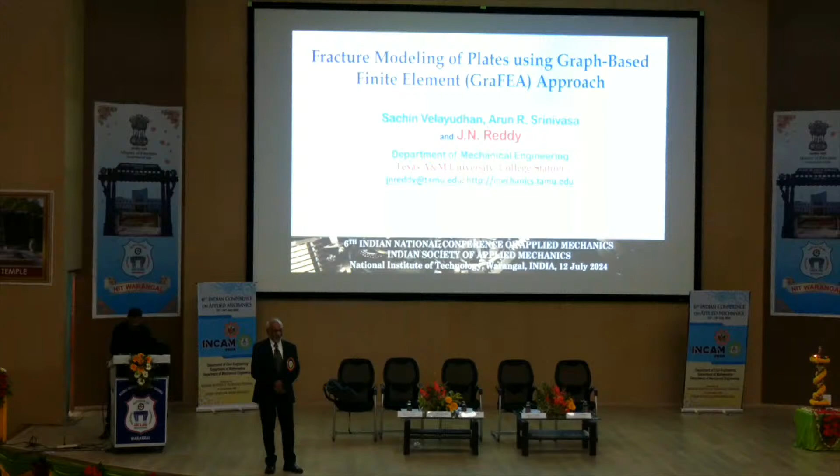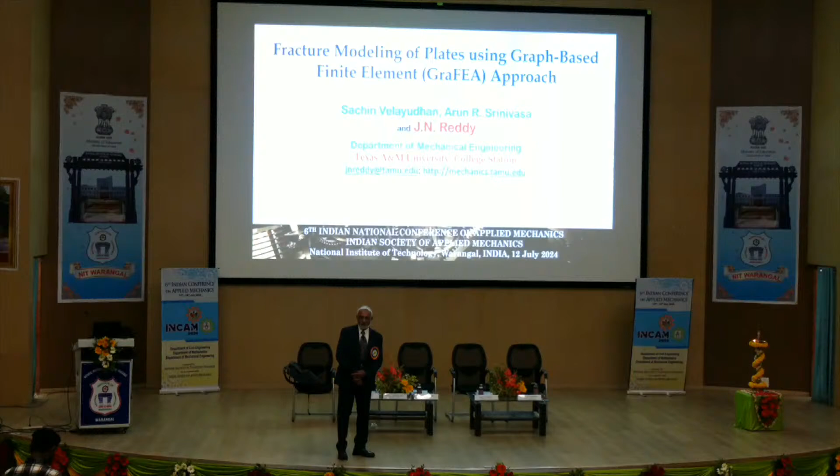Okay, once again, good morning. It's really a pleasure to be back. Since I'm from here, I don't know how many of you know, I went to primary, middle, and high school in Hanamkonda. So I will say, Endaro Mahanubhavulu, Andariki Vandanamulu. All of you know what that means, right? There are a lot of great people - to them, my pranams, namaskar. So I will start with that. Really, when I come to India, it is always a very special moment in my life. Especially now that I'm old and become more sentimental. My mission in life has been the same: creation and dissemination of knowledge, sharing the knowledge.

So my wife always asks, why are you traveling so much at this age?

Because I don't want to kill my passion. That passion, once it goes out of your body, you die very fast. So you always have to have some passion. Whether watching the movie or cricket or playing golf, all of those are passions. But passions that really somehow make a difference in society, I think that is even bigger satisfaction.

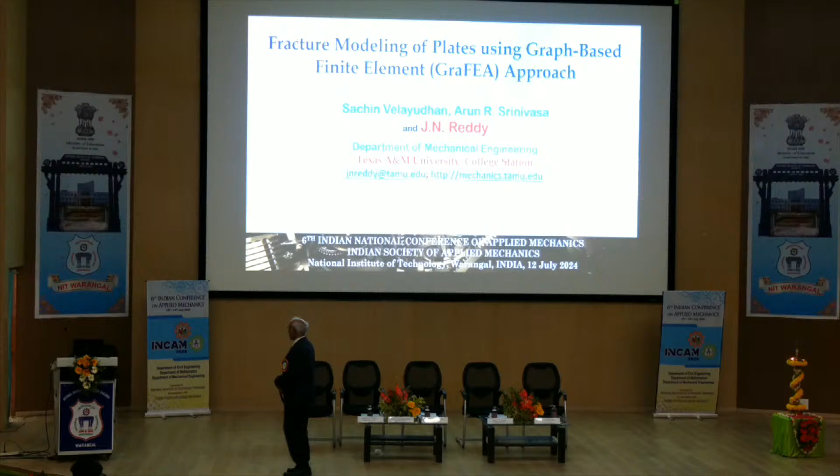So with those few remarks, let me get to work here. In the interest of time, I think we are running late, so I will try to give the gist or main ideas of what we are doing here.

As many of you know, fracture mechanics is really outside the domain of continuum mechanics. What I mean is, it does not allow you to have discontinuities. In fact, the very word continuum requires you to have a continuity of matter. The matter has to be distributed continuously so that we can take a limit in space, delta x goes to zero. It should not land on a different planet, so to speak, or different point. There should not be any gap. You should smoothly go from one geometric point to the other.

So this requirement makes continuum mechanics not able to cope with the fracture. So what do we do? Engineers are problem-solving people. We don't sit there and say, oh, I can't do it. We always say, I can do it. We find a way to do it. We have been doing that.

So there are many approaches, and we came up with an approach, and I'm putting the names in front of mine. Sachin Velayudhan is a PhD student, and Professor Arun Srinivasa is my colleague. And this is where I want to bring Professor Alvar's name. Arun actually was a student in his class, when Alvar taught strength of materials, mechanics of materials course. He was in his class.

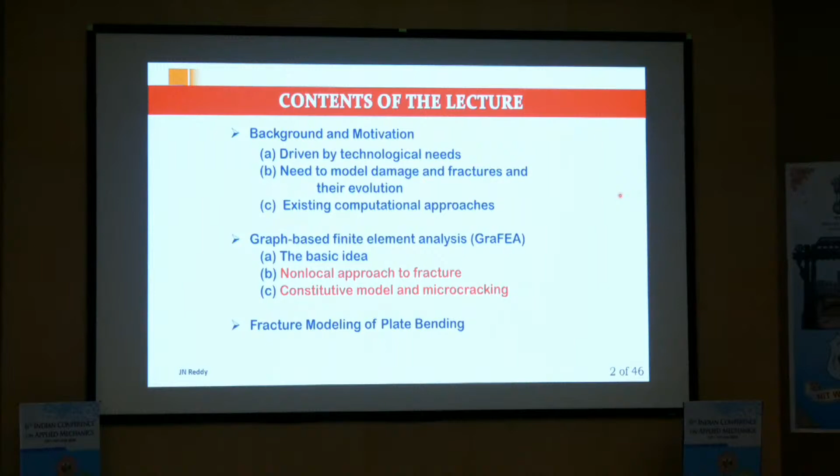And then we also, the latest work is about bending of plates. In the past we have worked on elasticity, both 2 dimensions and 3 dimensions, in predicting the fracture in concrete and glass. Now we are trying to do the same thing with plates in the sense that there is bending. And then the next step, which is not here yet, is to do multi-phase materials like composites, which are much more challenging because of different kinds of modes of failure.

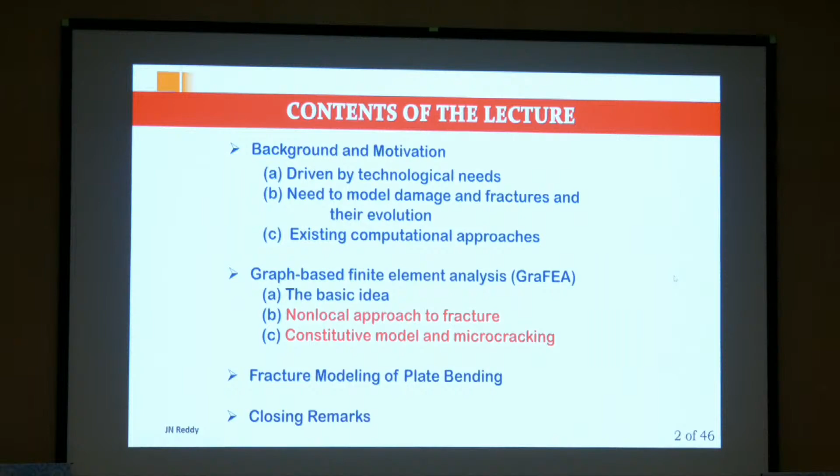All right, so let me say a few things in the form of comment. It's a very deep subject, and I don't want to show off here, so to speak, but I want to encourage or make you feel that, oh, there is something I can do. Follow up - we have the software which we can share.

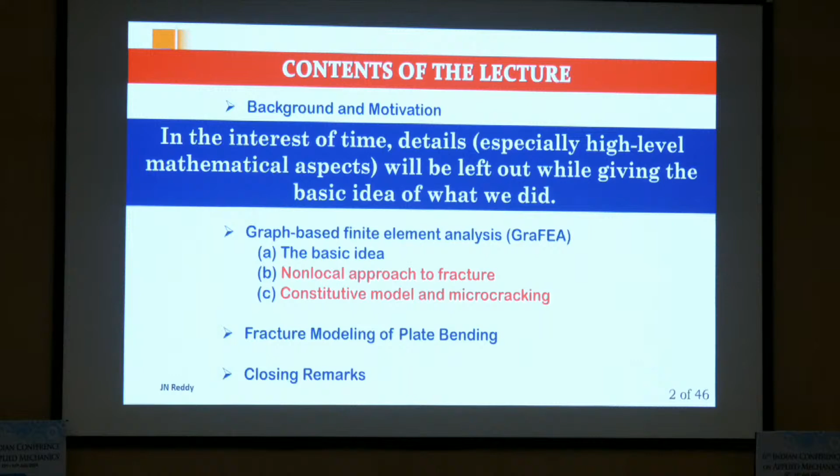The very first thing is to understand that micro cracking in materials is very common, whether it's composites or concrete, which is also a composite. When we talk about micro, we really cannot see it with the naked eye, so they are there—we may call it damage—but they coalesce during service conditions while doing their functionalities, and then they become cracks you can see with the naked eye. That's a very important problem, because once this damage develops and coalesces, functionality may be compromised. So we need to know in some way what the residual strength or ability to function is.

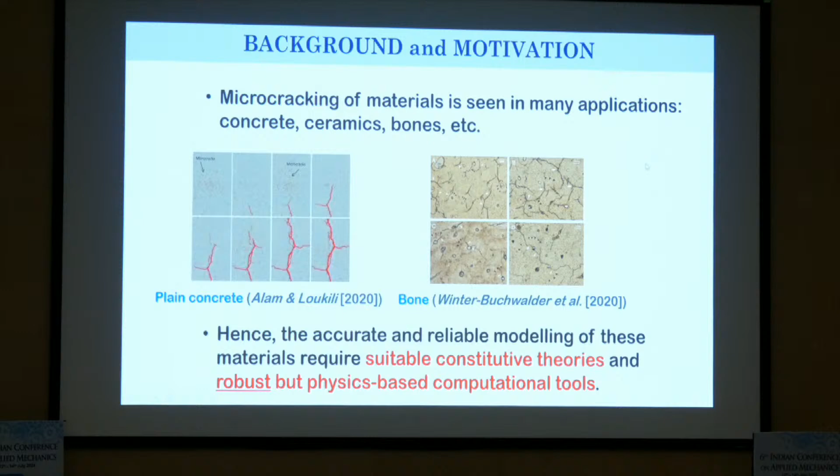So in general words, accurate and reliable modeling of fracture in materials is very important, especially constitutive models that dictate the prediction of failure. The most important thing we should all understand is that it is not the deterministic path of the crack, it is the probability of failure. Because designers don't look for deterministic things—the band in which it is going to operate is what they are looking for. We should really pay attention to the probability of failure rather than accuracy.

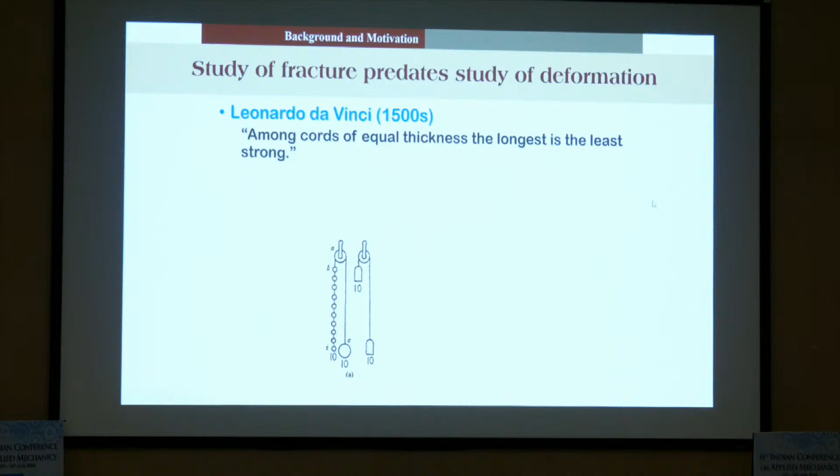Even before people talked about deformation, they were more interested in failure. Way back, if we go to Leonardo da Vinci and also Galileo, both of them said among cords of equal thickness, the longest is the least strong. Many of you know from strength of materials that deflection is proportional to the length cubed for a point load, or length to the power 4 for a distributed load. That means the longer it is, the larger the deflection, which can cause other problems including failure.

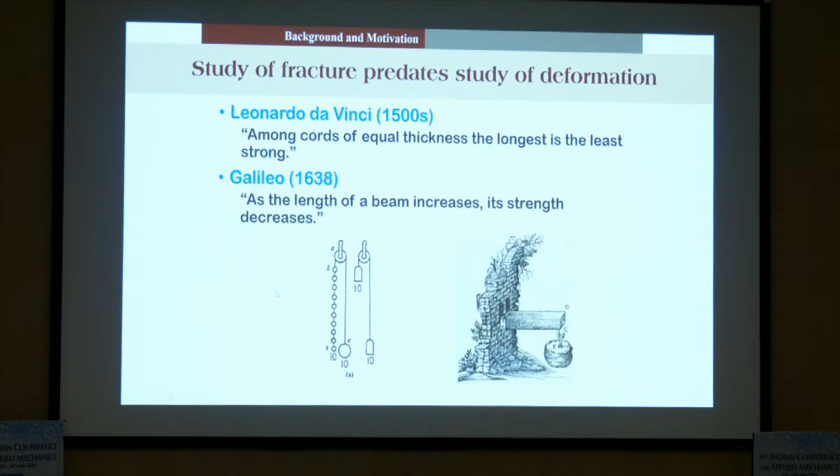And second, as the length of the beam increases, its strength decreases. Both of them allude to the same fact: that the weakening of a structure is connected to geometric dimensions in addition to material properties.

But the point I'm trying to make is that all of the existing techniques—such as the extended finite element method (XFEM), cohesive zone model, phase field, and even peridynamics, the new kid on the block—can only address single or multiple cracks. But if you have hundreds of cracks, they don't know how to handle it, because you'd have to put hundreds of cohesive zone elements and you don't know where to put them. XFEM is the same thing—that means half of the answer to the problem must be known even before you apply them.

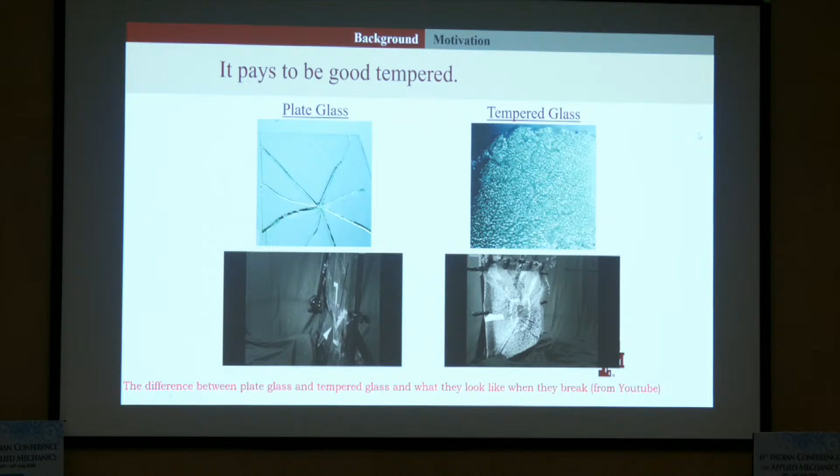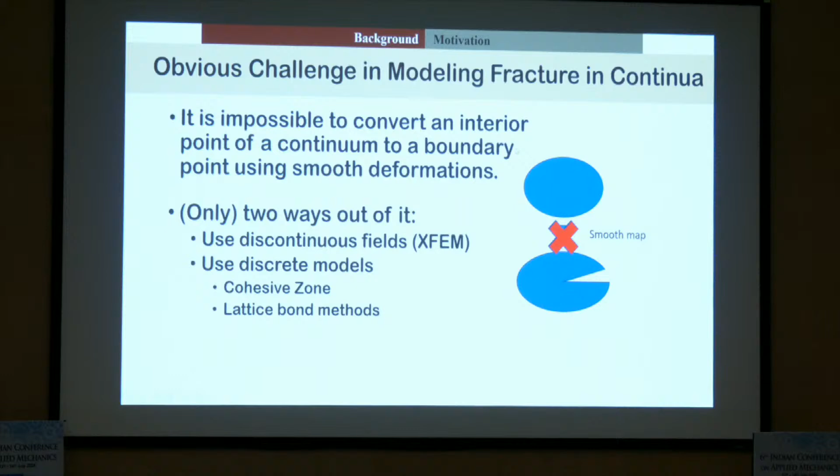So there are obvious challenges, as I said to start with. When fracture develops, an interior point becomes a boundary point, and this is not allowed in continuum mechanics. So how we get around it as engineers is to use discontinuous fields—that's what XFEM does—or use discrete models, numerical techniques such as cohesive zone models or lattice bond breakage.

Everything we do is a model—that's my statement. A lot of times people think continuum mechanics is an exact science. It's not. The physical laws, just like many civil codes interpreted by supreme courts of each country, have interpretations—meaning, what do you include in the statement. For example, Newton's second law of motion, what does it actually say?

The total time rate of change of linear momentum is equal to sum of the forces. It's a very generic statement. Then you have to identify what are these forces: short range forces, long range forces, magnetic forces. There are a lot of things. So to quantify that statement, we only take some parts of it that we understand and put it there.

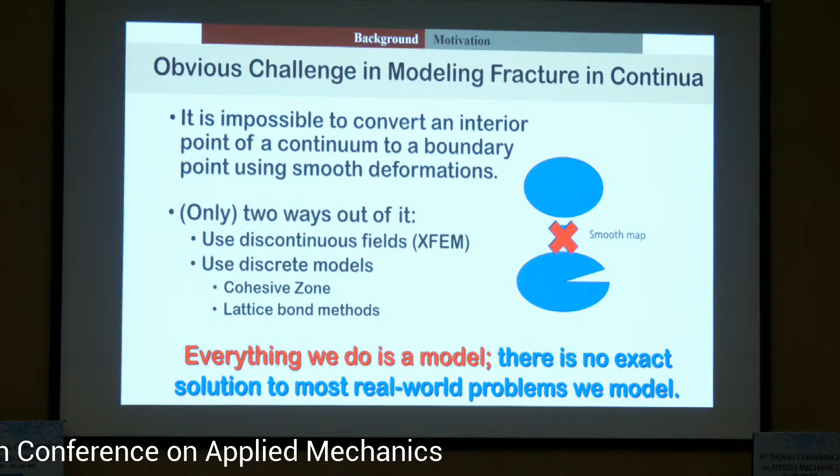So the quantified equation is a model, to the extent you understand it. There may be a lot of other things happening, other kinds of forces or stimuli. So what I'm trying to say is everything we do is really modeling, a representation of the physics to the extent we understand it. So there is no exact solution or exact mathematical model to anything we deal with. But that does not discourage us. We continue to improve. That is what research is all about.

So let me say that simulation of fracture has gone into two different ways in the last several decades. One is continuum-based models. That's where linear elastic fracture mechanics, continuum damage mechanics, extended FEM, all of those came, even including the phase field.

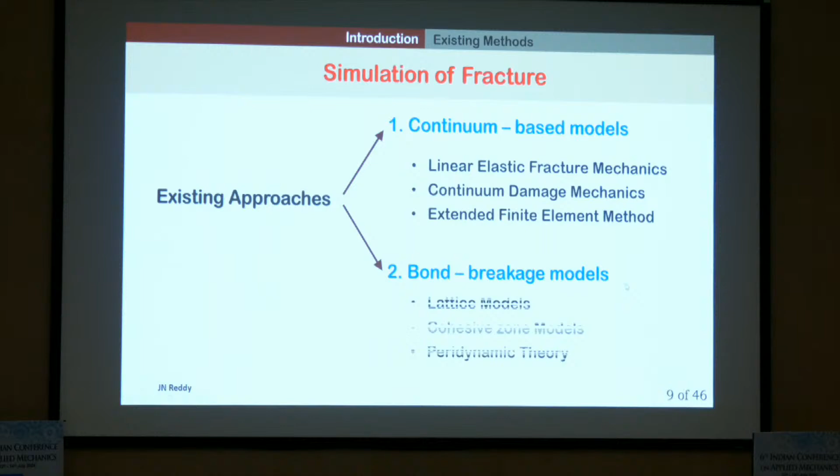Then there is a second category called lattice models, cohesive zone models, peridynamics, all of these ultimately breaking the bond between two points. So each one has its own merit.

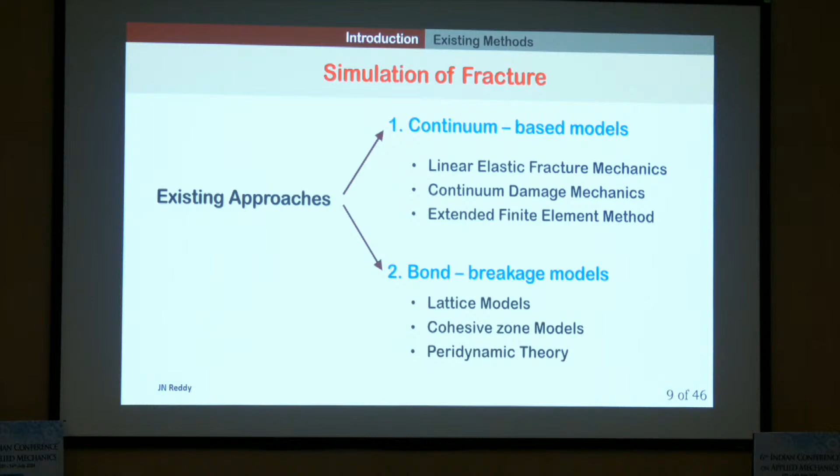But we want to do both. That means we want to solve problems that are continuum type, but they develop discontinuities because of damage and fracture. And bond breakage is very good, because all you need is to tell whether the distance between two points, and that distance is going to change because of the force acting between them, is discontinued because of a crack, breaking that bond. So we want to bring both of them into the model, and that gave rise to the approach we are talking about.

So let me go and review shortly or briefly this linear elastic fracture mechanics. It really addresses one single crack. So if you have a couple of them, it is really very hard to do it, especially crack closure.

And many of these methods are not able to do crack closure. Because if two cracks are perpendicular to each other, while one is propagating, the other may be trying to close. By the way, I'm not saying it is going to bond back, that doesn't happen. But closure is real, right?

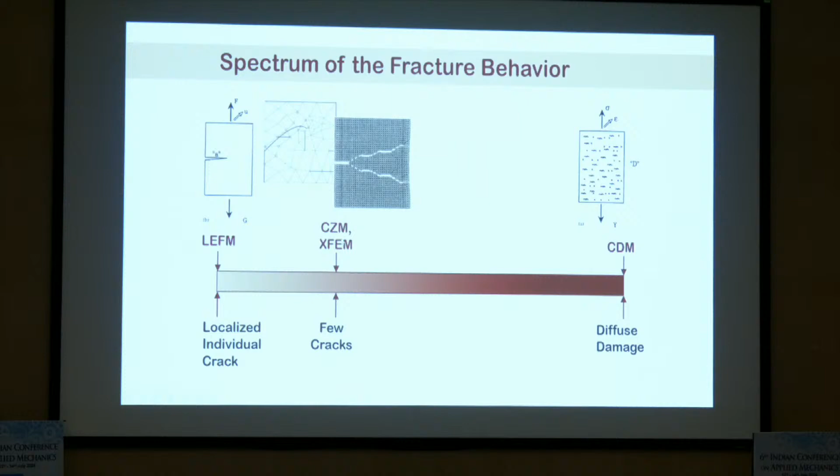So CZM, the cohesive zone models, XFEM, all of these deal with few cracks. And when you go into many cracks, then you have to talk about bond breakage. Especially if it has millions of cracks, continuum damage mechanics or diffuse damage is the other extreme. So all of these have to be accounted for. And of course, if you are only interested in one or two cracks, you can remain in that area.

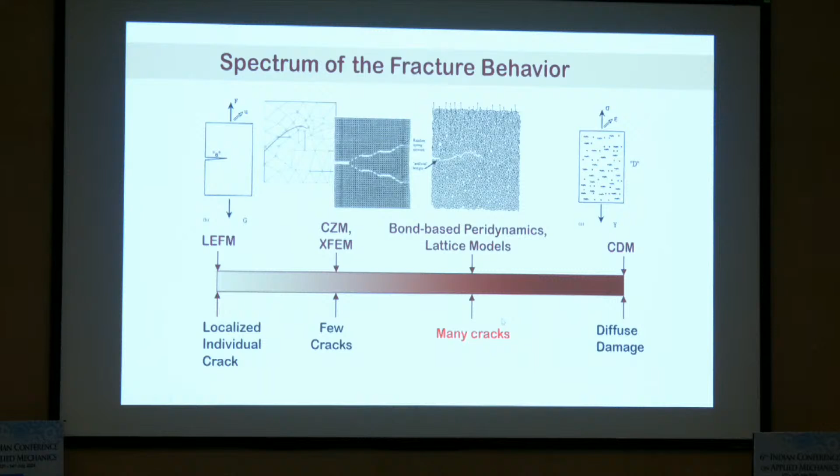But if you have many, many cracks, especially as seen whenever you see concrete, where the slab is poured and after it settles, you can see a lot of micro cracks. So that's the reality. So we have to address how to take care of them.

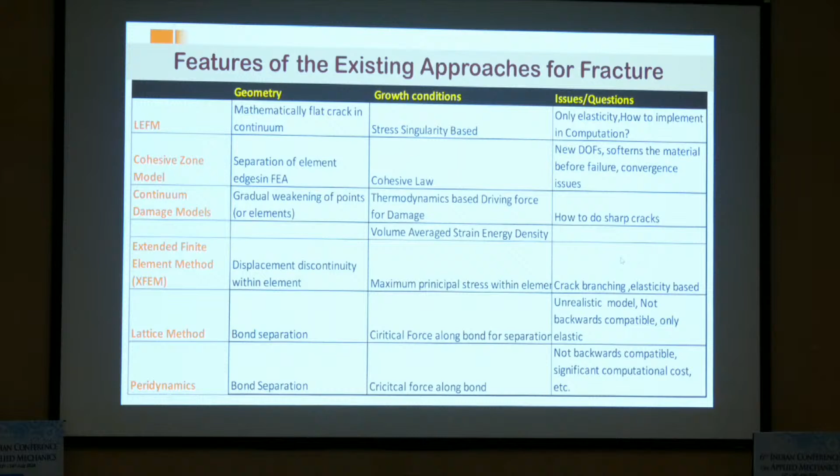All right, so I don't want to read any of these, but I listed different methods and what are the issues with them. None of these are able to do every one of the problems I listed in the previous slide. So how do we deal with the geometry of fracture?

We will use the concept from graph theory. Graph means, really, as engineers, graph is to plot points, right? So the same thing in the case of discrete structure, you identify points. In finite elements, they are nothing but nodes of the mesh. So by connecting those nodes, you're creating elements.

But what we have done traditionally, every time we wanted to compute stress, we use the nodal values to come up with the displacement function, then differentiate it, get the strains, then multiply with the material constants to get the stress, at Gauss points, interior of the element. And then if a Gauss point experiences a threshold, exceeds the allowable, then we declare that element failed. So this is very broad brush.

So what we did, accidentally, I and Arun Srinivasa wrote a paper without thinking fracture. Why don't we actually calculate the forces and strains along the edges of the element? Think of a triangle, so along the sides of the triangle. We can do it, right? We can write along any line if you want. So then it occurred to us, if I know that force along it, I can also check if that force exceeded the value.

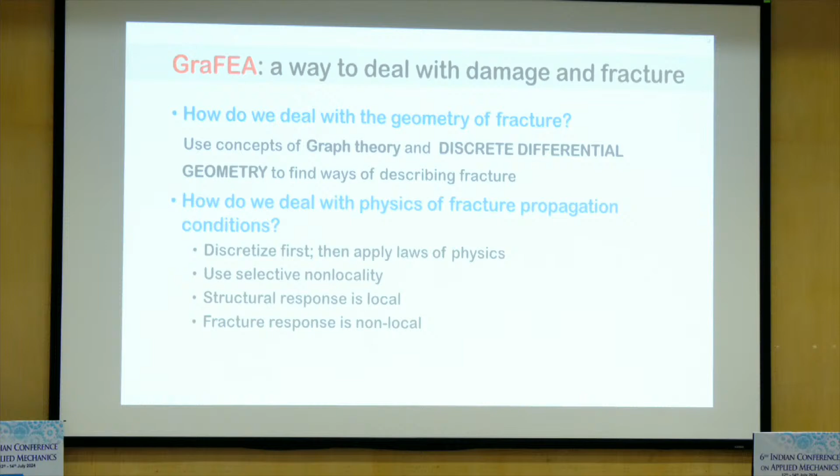Again, in the interest of these things, I started with these points and connected them. This is the graph, but that graph is nothing but a mesh of finite elements. And another very important thing in our work...

We give a lot of value to duality. Duality plays a great role - some people don't recognize it, but that's what it is. Finite elements is about duality, but in the books they don't mention it too much. Structural mechanics people are more conscious about it, because there is always cause and effect. One causes the other - you cannot ask for both to be determined. You have to know one and determine the other. That is how the reality is.

So we say the primary variable, such as displacement, lives on the primal mesh, which is shown here, whereas these dual variables live on a dual mesh, which is really nothing but Voronoi diagrams for the given structure. That means by cutting through these edges, you come up with another polygon, and that is where, along this boundary of the polygon, the fracture propagates.

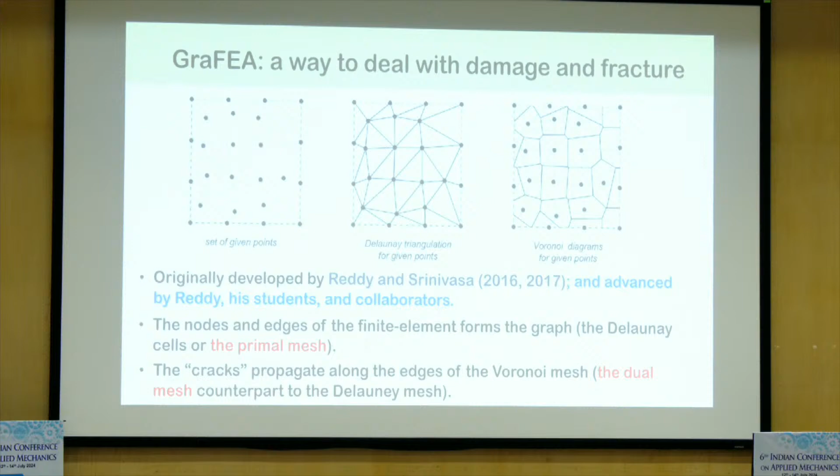So, anyway, this is the paper I was referring to, and that is what led to all these later developments. I won't go into all the details here, but the fracture modeling in the case of plate bending is the latest work I want to share with you.

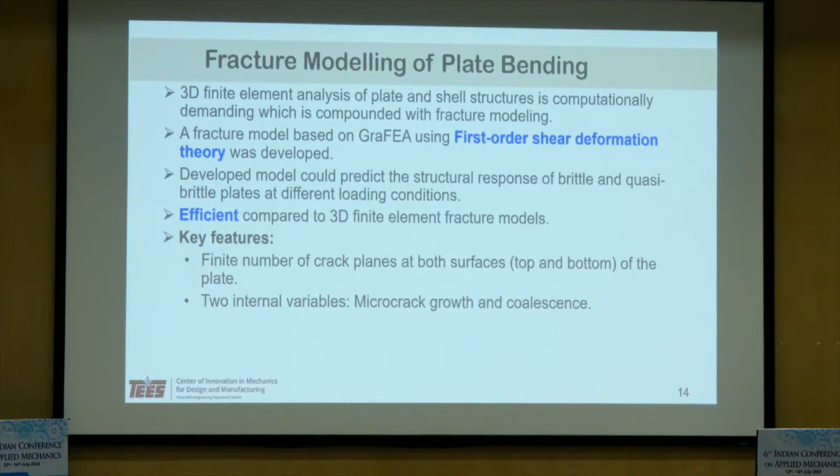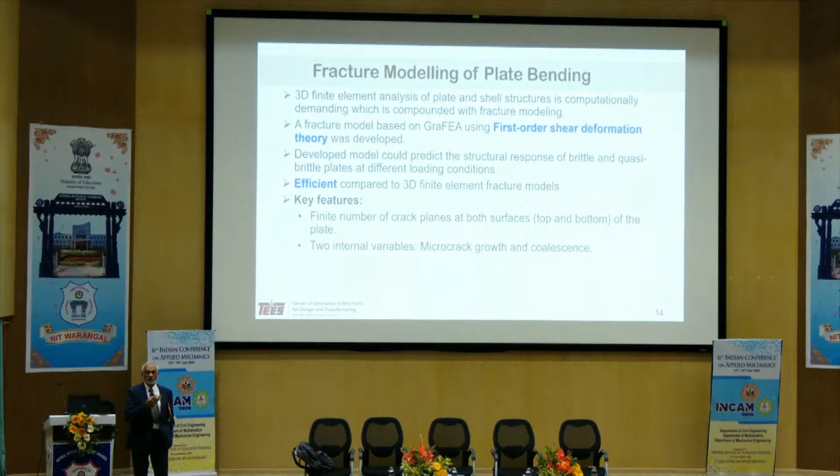3D finite element analysis of plate and shell structures is not common because it's computationally very intensive, independent of fracture mechanics. For example, if somebody models an automobile body structure, they don't use 3D elements. Maybe for a piston rod they may use 3D elements. Because we have very powerful plate and shell elements in Abaqus or ANSYS, it is much more economic computationally. So when you think about plates and shells, you really think of plate and shell theories instead of 3D elasticity.

So we bring that into fracture modeling using the first order shear deformation kinematics. That means we account for the transverse shear strains also, which is not common in the traditional or classical plate and shell theories. So we developed a model that could predict the structural response of brittle and quasi-brittle materials at very different loading conditions, even including strain rates. We actually do dynamic analysis, impact. You will have an additional lecture tomorrow on that kind of thing.

The key features are a finite number of crack planes at both faces. When you do impact on, say, a plate, the crack actually develops at the bottom first, not on the top. So we model both surfaces. In plate and shell theories, only the mid-surface is the real action, but we created a mechanism to study what is happening at the top and at the bottom surfaces. In an actual physical test, a drop test, a sphere dropping on a plate, it actually develops a crack that initiates at the bottom and then propagates through the thickness to the top also. So it is three-dimensional in terms of the actual physics, but in the interest of computation, and also the ability to see what is happening at the top and bottom, we were able to accomplish that through the crack planes.

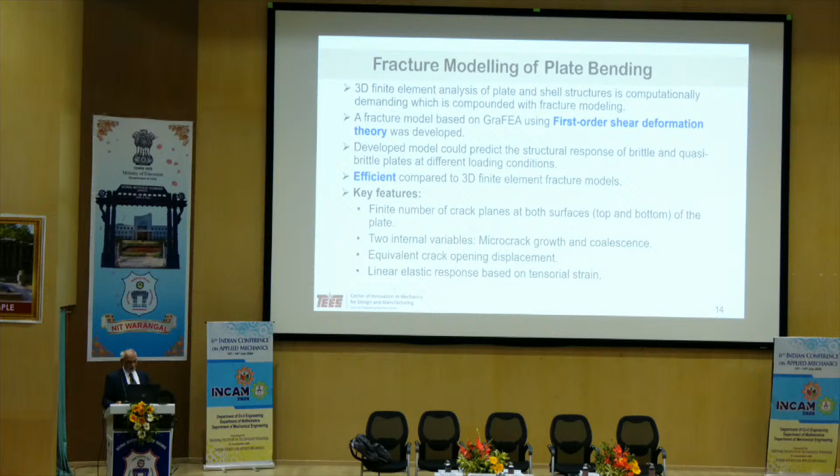Two internal variables are micro crack growth and coalescence. This is a kinematic quantity. We also have an equivalent crack opening displacement. When I use the word equivalent, it means it's an integrated value. And there's a linear elastic response based on tensorial strain.

If you think of a typical asbestos or plaster of Paris plate, after it is made, you can see typical cracks. So we create these planes, and as I said before, if it is 2D, we use a minimum of 3, but here we are using multiple, even to see if it makes a difference.

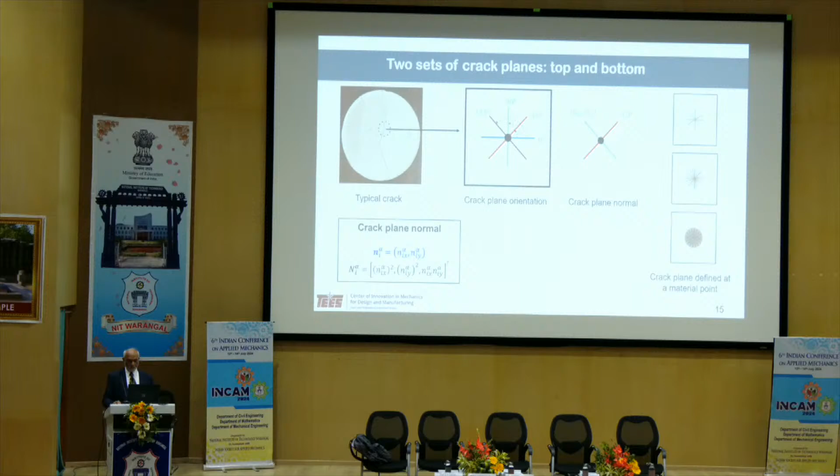In continuum mechanics, area is not treated as a scalar, we treat it as a vector. The magnitude is the area magnitude, and the direction is the normal to the plane. This really helps us in a lot of ways analytically in writing the equations, so we use that concept here. The crack plane, CP, is shown here in red, normal shown here, and of course it will have components—the normal will have X and Y components. It's a little bit deep here, but I want you to get the general idea.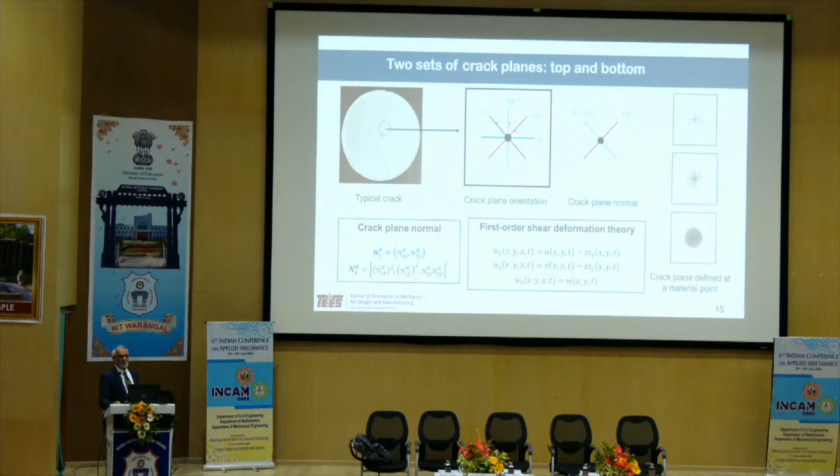We start with the shear deformation theory shown on the screen, where we have rotation functions Rx and Ry. Rx is the rotation about the y-axis, and Ry is the rotation about the x-axis—only because it appears in the x component of displacement do we put x, but the rotation is about the y-axis. Cracks can develop at the bottom or top depending on initiation, and on how you are bending the plate. Tension is what causes the crack opening, so when you bend convex up, the crack is going to be at the top first before it is at the bottom. If it is stretching, of course, it shows up uniformly.

This is where a lot of non-locality is brought in. This is a deeper subject, but I'm trying to avoid discussing the detail. Most important of this is integration of the strains within that sphere or circle, and also bringing in the probability function. You can see that phi here is not like a phase field phi—it's physically an indicator of whether, if it is 0, the crack has opened.

If it is 1, the material is intact. Okay? So that is the idea.

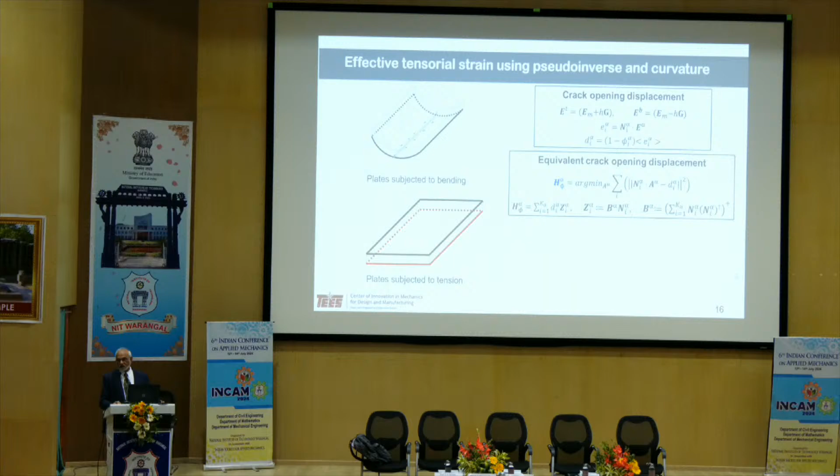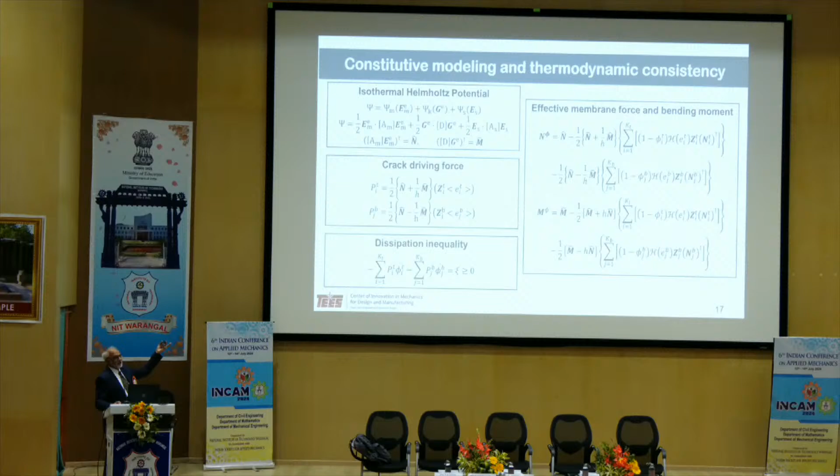We go on to define the Helmholtz potential in terms of the strains. In the case of plates, you will have in-plane force resultants and also bending force resultants. It doesn't make sense just looking at the slide, so understand the general idea, because there's a lot to read to go somewhere with it. So this is where the non-local strain comes in.

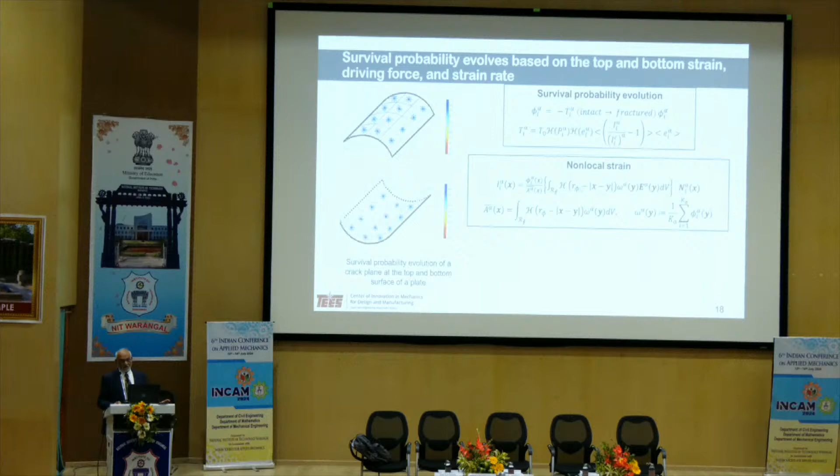Anytime you see an integral statement, it means it is a summation. You see some features that you'd see in bond breakage or even peridynamics. If you are at a point X, any other point around it is Y, and we measure the distance. That length in 3D, if it's going to break geometrically, that is how the strain is created. That means change in the length, right?

That's what our strength of materials thinking of as a definition of strain. This model requires 7 parameters, as opposed to some 32 or 37 parameters in Bazant or others. Many of ours are very physical, others a little bit mathematical.

So this is like Young's modulus, shear modulus, Poisson's ratio. This RP is the radius of the circle in 2D, the radius in 3D of a sphere. This is a parameter you have to choose. How do we choose? As I said before, it is the average grain size.

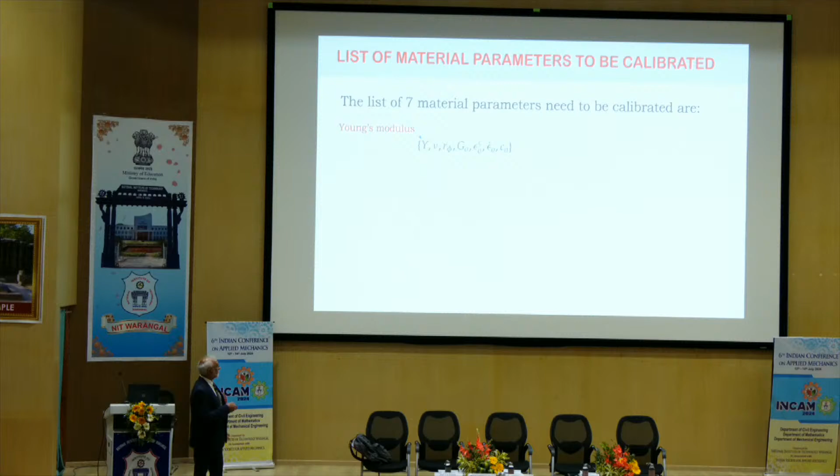If it is a crack in concrete, what is the average grain size of the concrete? That is how, or if you want to use the stress intensity factor for that radius, that's okay too. We've done that also in some problems when we didn't know the grain size. All right.

Sometimes I'm explaining different things because these are introduced in the non-local model that we introduced. You can see the critical tensile strain rate, the power law coefficient in the power law we introduced in the thermodynamic context, and this is the threshold for the tensile strain.

In fracturing, the kinetics controller is this G0. I said shear modulus-like thing. All right, so then finite element implementation.

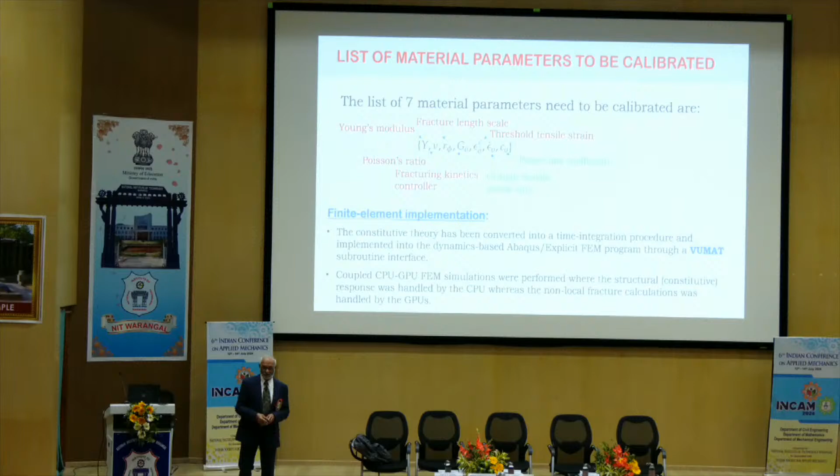This is another very nice thing. We did not write another code ourselves. We created a VUMAT, so we are making use of all the finite element technology: mesh generation, mesh refinement, solution of equations, post computation—everything is there in commercial code. So we exploit that, and we do all this non-locality through VUMAT.

And we can give you that VUMAT. We have created a user's manual, and I have it on my computer, so I can send it to anyone.

Of course, what we expect from you are two things. One, acknowledge if you do some work with it—that's the fair thing, respect each other, don't steal from each other, right? The second is tell us your experience so that we learn. Just like all these softwares, one day they start as freebies, and once you're hooked, they start charging, right? So we are not going to charge, okay, that is a promise. But we want to learn from your experience and see if we can improve—that's the value we get from you.

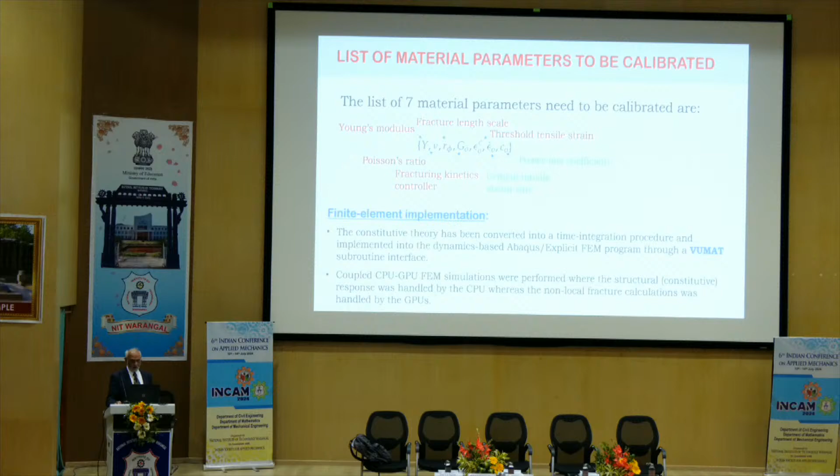And of course the rest of things—oh, one more thing I forgot to mention. We also have a collaboration with Prakash Thamburaja from National University of Malaysia. He spends time with me every year in summers. He was a former student of Lalit Anand from MIT, so he's very good at the Abaqus implementation.

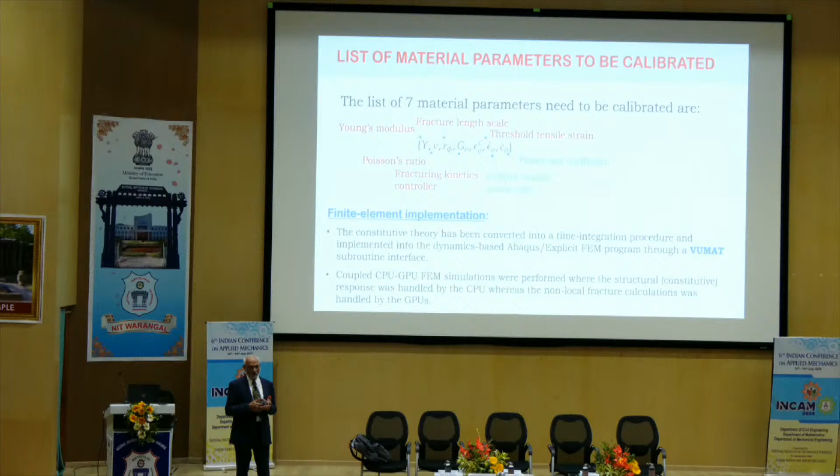This is where collaborations help. Having deep knowledge about mechanics is not enough—you have to implement it, you have to translate that into a computational algorithm. That means you also have to have good ability to translate into numerics.

So remember those 7 parameters—first you have to calibrate, and that's where we use the experimental data. So you'll see a lot of experimental comparison. I'm not going to compare with peridynamics or phase field because they're all numerical—that does not validate my work.

So I have to compare with the experiments and use experiments to extract these 7 parameters. This is a DENT response of plain concrete, impact. We first use one of the experiments, and by the way, a paper can have more than one experiment reported.

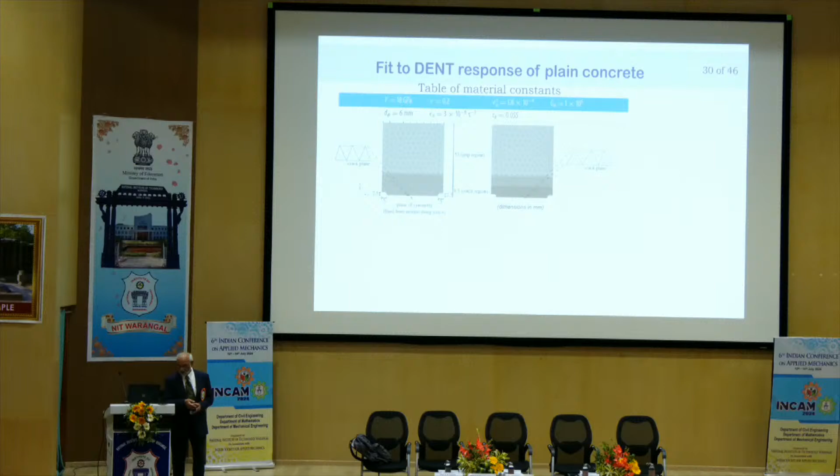So we use one experiment to extract that, then we predict the results of other experiments reported in that same paper. That means we don't validate every time, then it's cheating, right? Because I'm just using that to get my parameters and show. That's not great. So only one experiment is used to extract the parameters, then we use the same parameters without change and predict for other strain rates, even 2 orders of magnitude difference. So this is what we really started feeling good, that we have something really worth sharing with others.

So you see there are many things, you don't have to read everything. There are different numbers of crack planes, CP is crack plane. So what you see over many of these curves - if you are really a theoretician, you always look at how much difference. For a practical purpose, all of them are the same, no big deal. Real world is not looking for exact things because there's no such thing as exact.

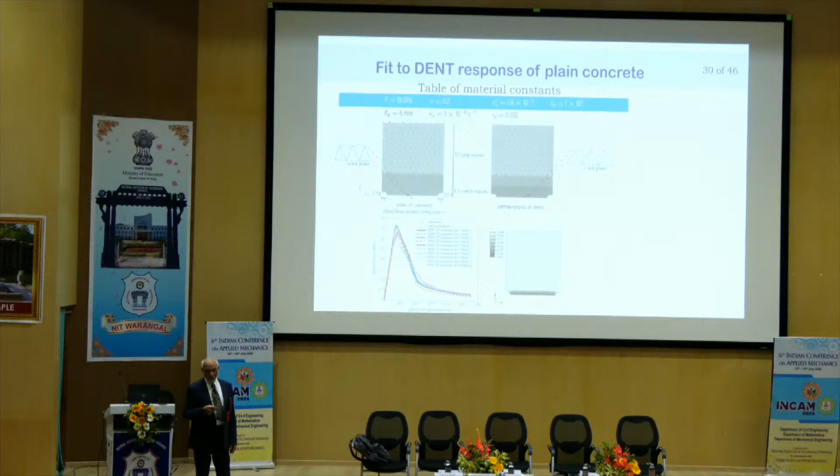There's a lot of ignorance because we don't know everything, right? Materials are very, very complicated. Same specimen made by the same company is not going to be identical when it comes to fracture. Any minute, small, micro thing can change the trigger, different cracking. So it's a waste of time to really focus on the exact thing.

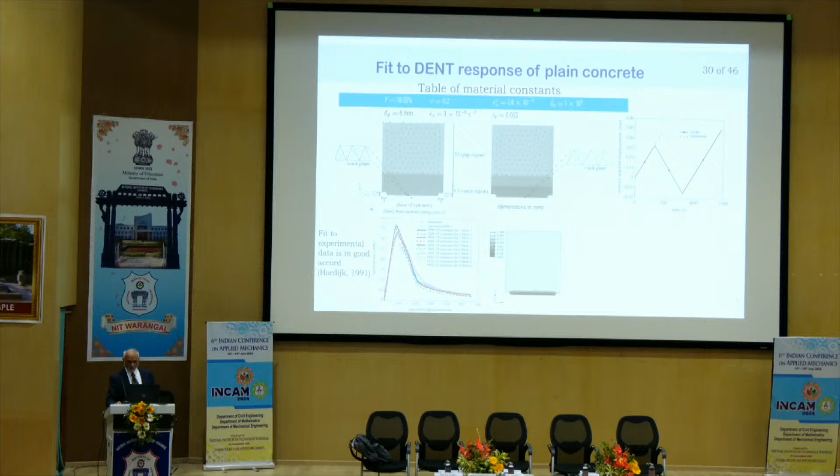So you look at these and say, oh, they are very good. That is how we take satisfaction. So we have done many examples, and we even went on to compare, in some cases, just to tell people how good it is. And this is one of those, to get mixed cracking.

You can see these are the supports, and if you apply loads, it's going to create a crack here and it will propagate. By the way, the method does not need a crack to start with - it can predict initiation, propagation, branching, and also closure. So that is, I think, very exciting.

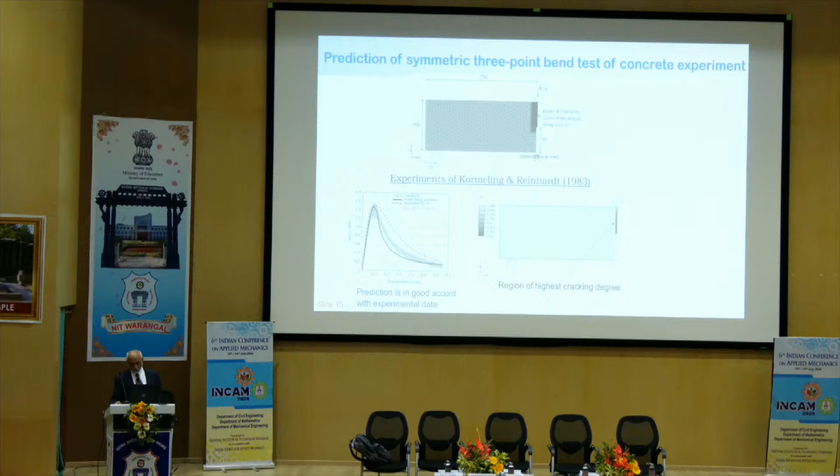Think of a concrete block which is fixed here, and now you are pushing here, so you know the crack will initiate there. This is more or less engineering intuition, right? So all you do is create a little bit more dense mesh without knowing which way it's going to go. This is where cohesive zone model needs a little bit more help - where is it going, so that I plant the elements.

Here I don't need to do that. Only thing I need to know is where it's going to initiate. That is where our engineering intuition tells you it will start somewhere here. Whether it goes this way, this way, this way, all of that is going to be done by the physics.

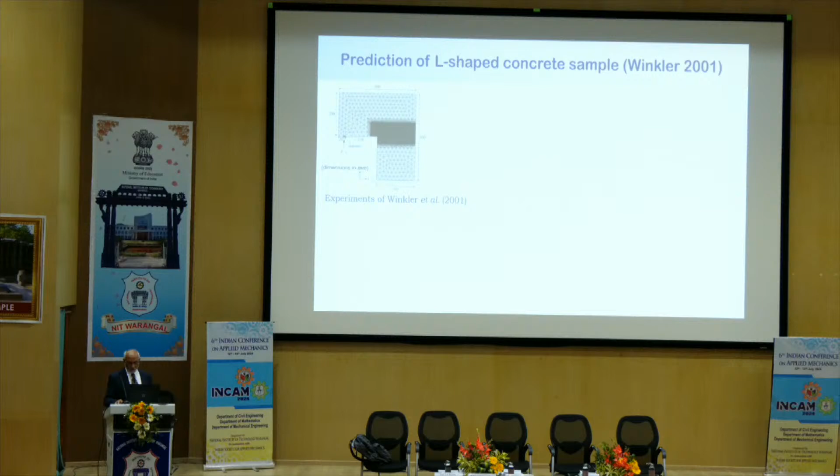So we started doing our own experiments. I'm not an experimentalist, Arun is not, but we thought it's not a big deal to create a simple tabletop experiment.

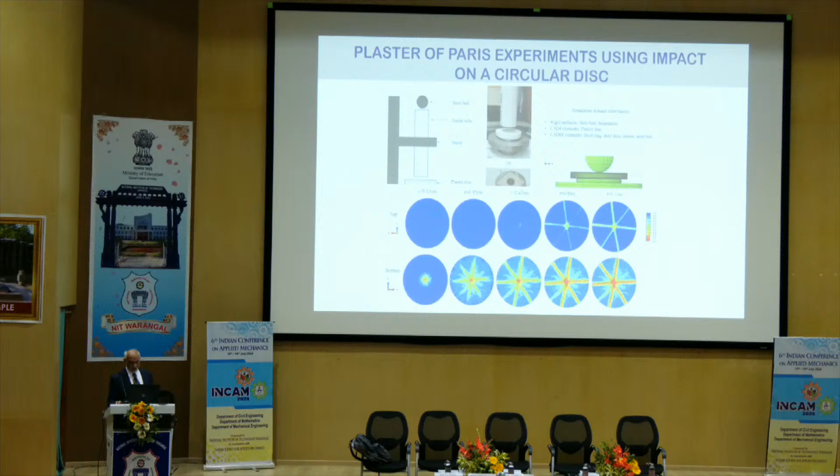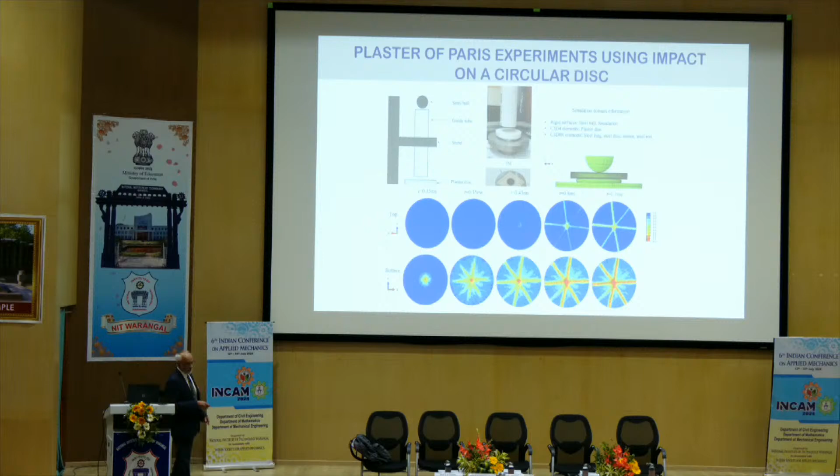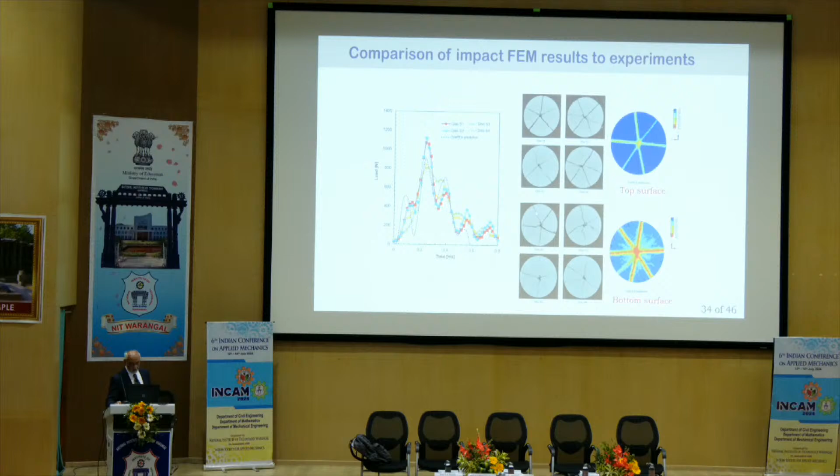We compared these results at different velocities. You can see top is here, bottom is here. It really starts at the bottom more before you see it at the top. Nothing here at the top. As you go more and more, it starts showing at the top. You'll see they're all kind of predicting similar valleys and mountains, and these are different sets of number of crack planes we used.

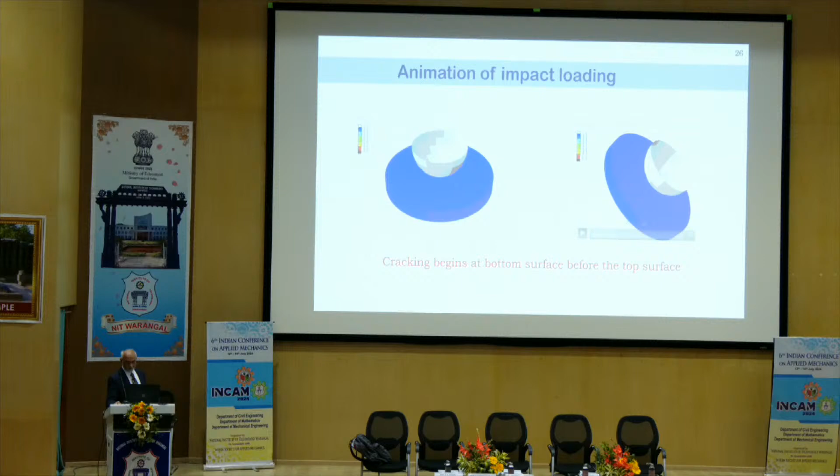So Pani, you have to tell me when to quit, okay? You have to, because I don't want to. So this is another one.

We also do viscoelastic material. This is a plate with a hole. We are using half of it, subjected to forces, tensile forces. We use different kinds of meshes: coarse, medium, fine, and very fine. You can see all of them more or less agree. Even the so-called coarse is a relative word, there may still be thousands of elements, and by the time we come to very fine, it runs into millions. So this gives you a feeling that we have a method that basically converged.

So there is no more mesh dependency, and this is another important thing. There are no existing methods that have this property, they are not mesh independent. Results keep changing as you refine the mesh. We found after all of this that the non-locality concept is necessary to remove the mesh dependency. Without that, it will depend on mesh.

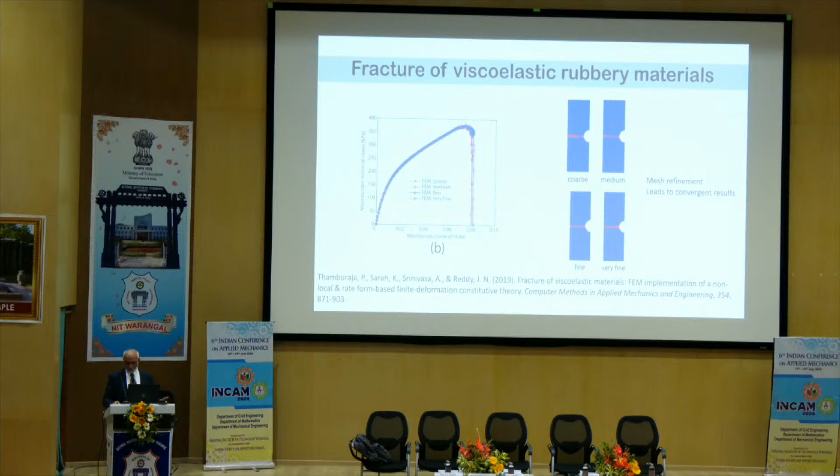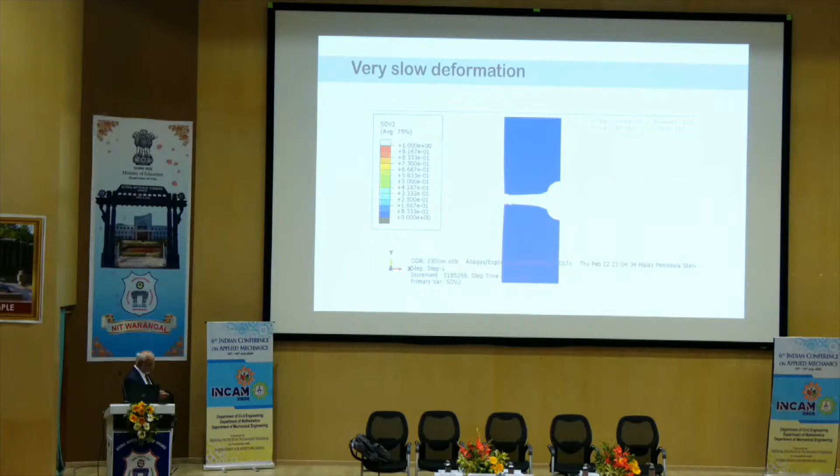So this is a picture, it will show for the very slow deformation. You have to have patience, but by the time, now you can see how it is tearing up. If you go a little faster, next slide, it will take a while to start, but once it starts, it zips through.

You can see a little bit of this zigzag. You know why that is? We have elements, it's only cutting through the edges, not along the interface, so I'm not lining up the interface. The elements are being cut, the edges are being cut, so there would always be that zigzag. This is the computational result.

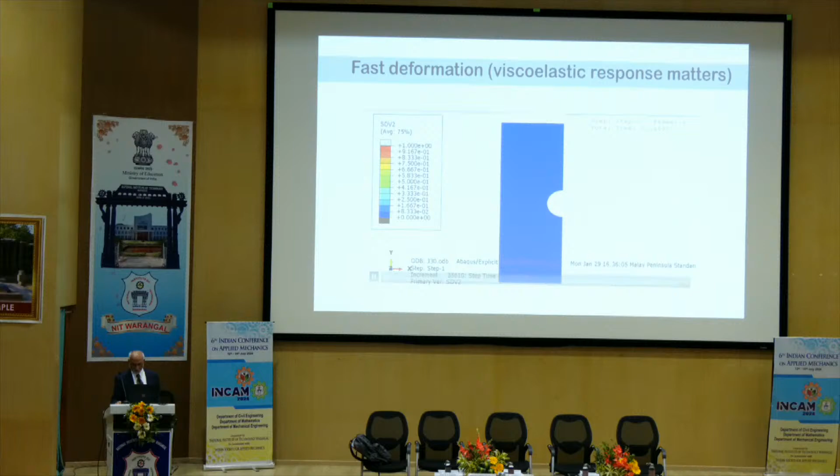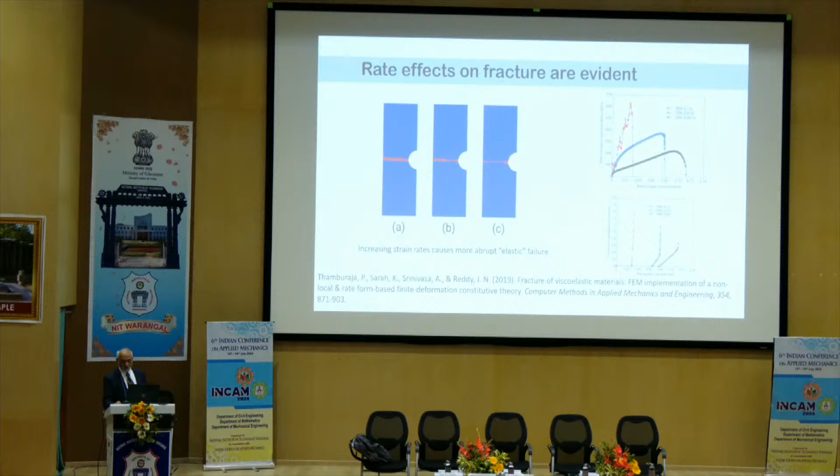Now let me go to another slide. This is what you see for different speeds, listed here.

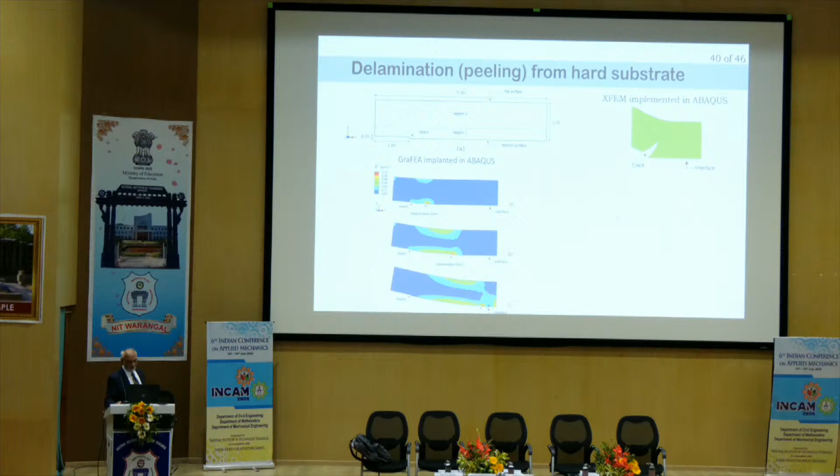We also studied delamination, peeling from a hard substrate. It's like you put a tape and pull it, a scotch tape bonded to the floor for whatever reason, and you're peeling it, and we can study that too. We were able to predict it, and XFEM could not even converge. You can see what XFEM is doing here versus this is our result.

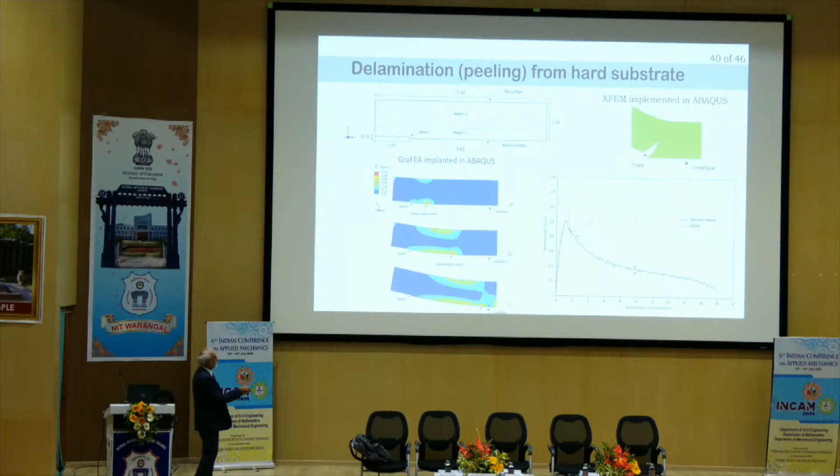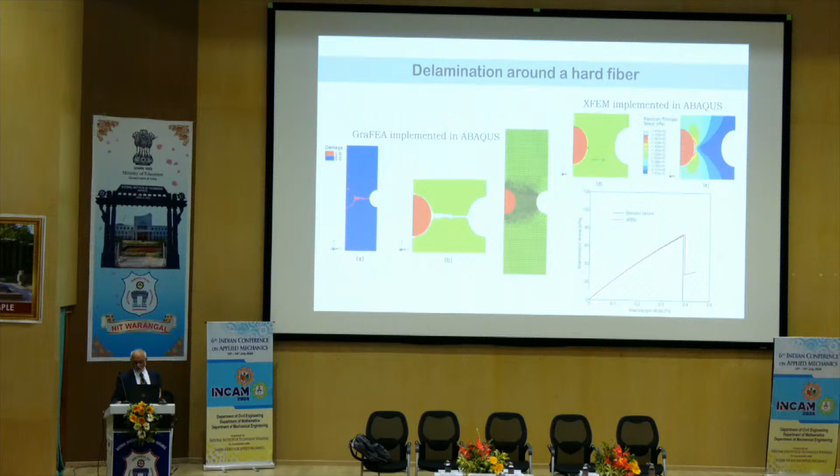There are a lot of other interesting things. If you study a material, this is really one of the things we will use when we go to composites: matrix and then a fiber. When crack initiates at point 1 and then it goes, if it is XFEM or cohesive zone model, it will stop here because it doesn't know where to go. Whereas ours zips through, because it does not penetrate the fiber, which is very stiff. This is a very interesting observation. XFEM stops there, whereas ours goes through, and the results for the maximum value are the same, which is good to know.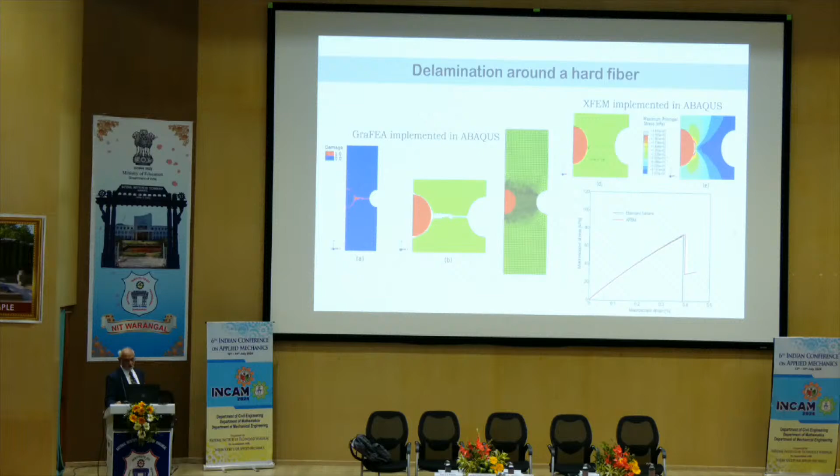Oh, sorry, what was that sound? Okay, all right, thank you.

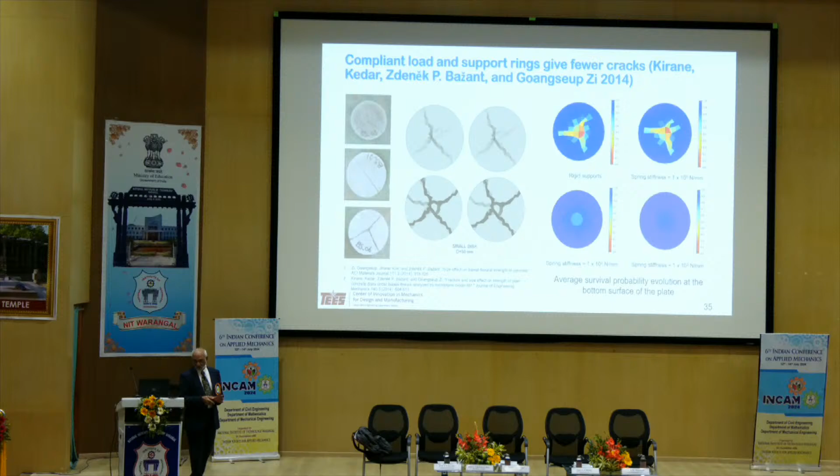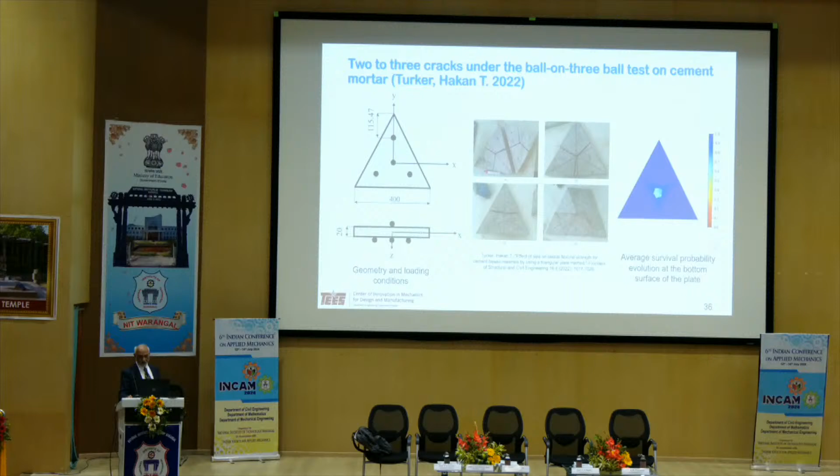Okay, we also did this triangular plate with three supports at the bottom and then impact from the top. Again, you see the experimental results, not our experiments, and those are the GraFEA results. So you can see it's kind of predicting what you see here. And this is maybe the last one.

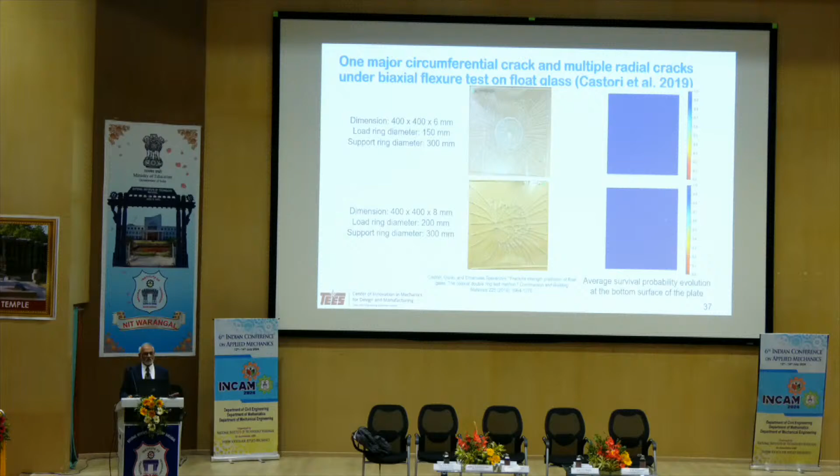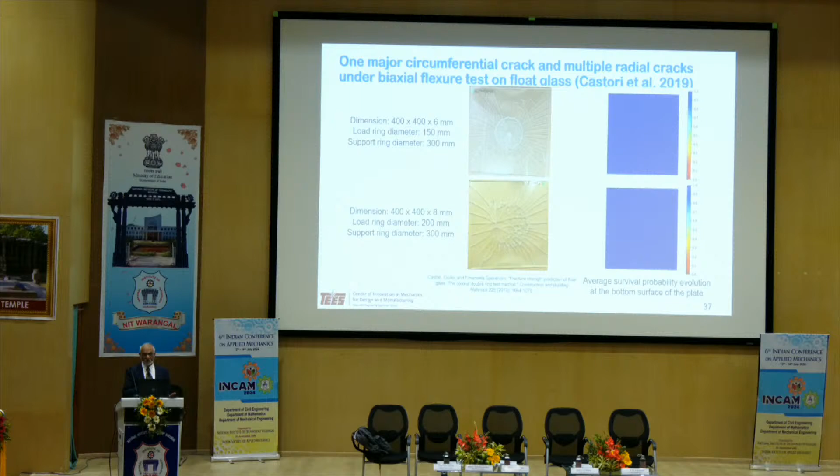So then you say, oh, is it really getting exactly the same? As I told you, I cannot talk to the material, right? The material has its own flaws or micro damage. Unless I know that, I cannot put it into the model. So we can only look at it and say, oh, we are close. And that is what a designer is looking for - are you in the ballpark? Okay, all right, so I think I need to move on, there are many other things.

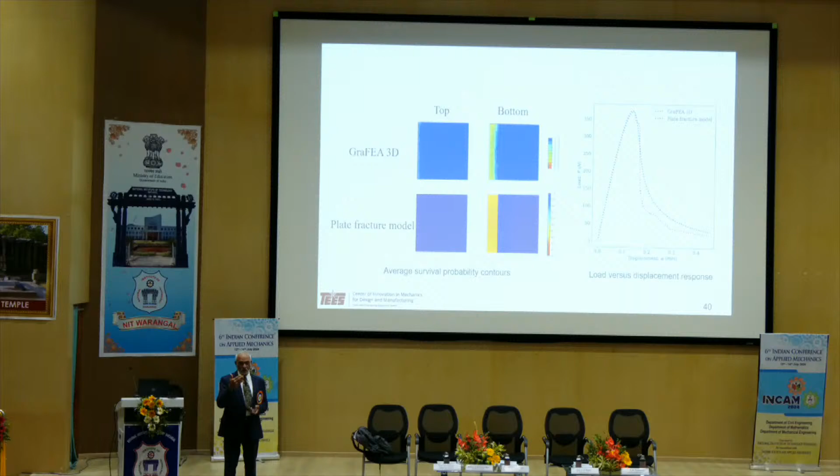Plate bending theory, first order shear deformation theory. So it's very nice to see 3D and 2D predict the largest load very accurately, and the loading part is almost on top of each other. Unloading is slightly different, so you see the difference between 3D and 2D. 3D sees the crack as a surface through the thickness, 2D does not, because plate or shell theories are just mid-plane. So you only do post-computation to see through the thickness, because post-computation in plate and shell theories allows you to compute the strains at any thickness point also.

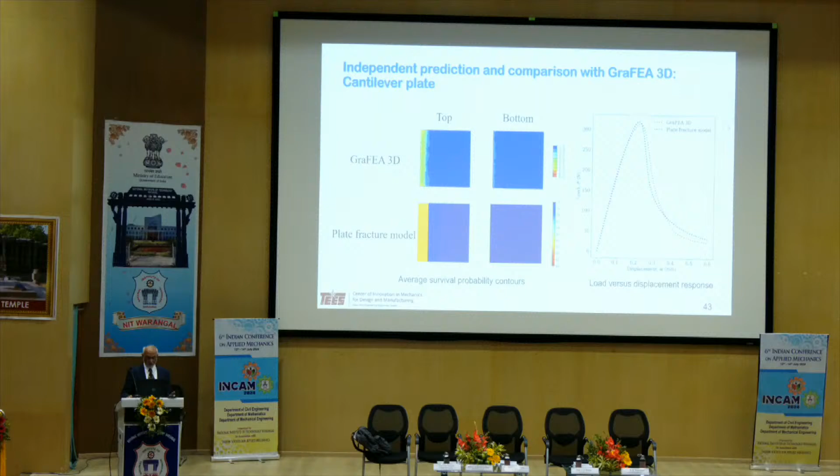So we did a cantilever plate, same thing, results are very good, promising. And that is the last one, circular plate. So I'm rushing a little bit, but anyway.

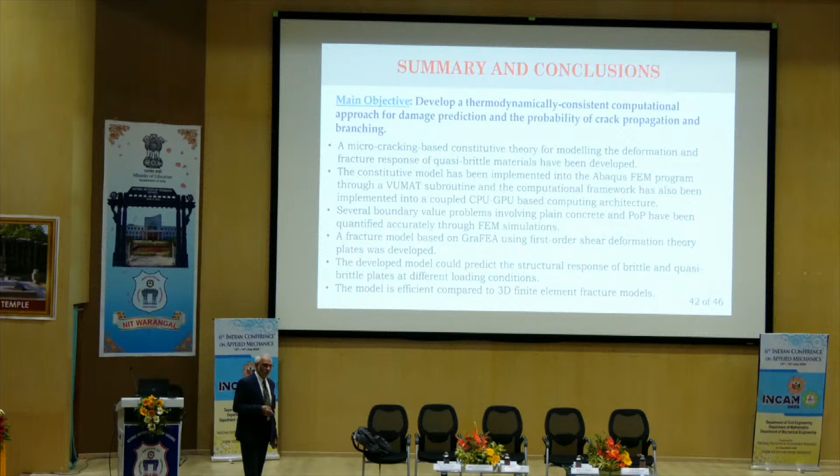So when you violate that, for example, take phase field - I'm sure some of you are doing it, it's not a criticism, but an observation - what is the phase field parameter's physical meaning? I asked several people, suddenly they get caught. I said, oh, I don't know, maybe it is the number of particles that are separating. So it's just happened to be a parameter in the model, that's it, no physical meaning. And they say they're minimizing it - how can you minimize something irreversible? You see what I'm saying? It cannot undo.

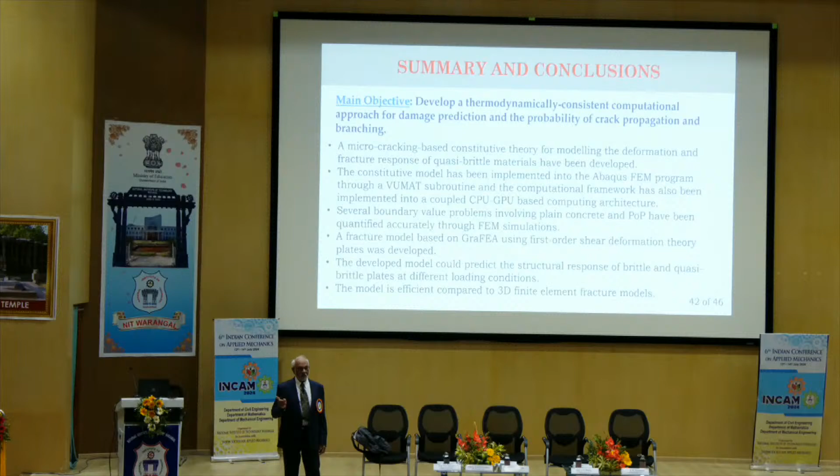It can only do one thing, right? So it cannot close something. So what I'm saying is there are thermodynamic issues with a lot of these things. The purpose is not to criticize them. How do we better it? That's our goal, and that's what we're trying to do.

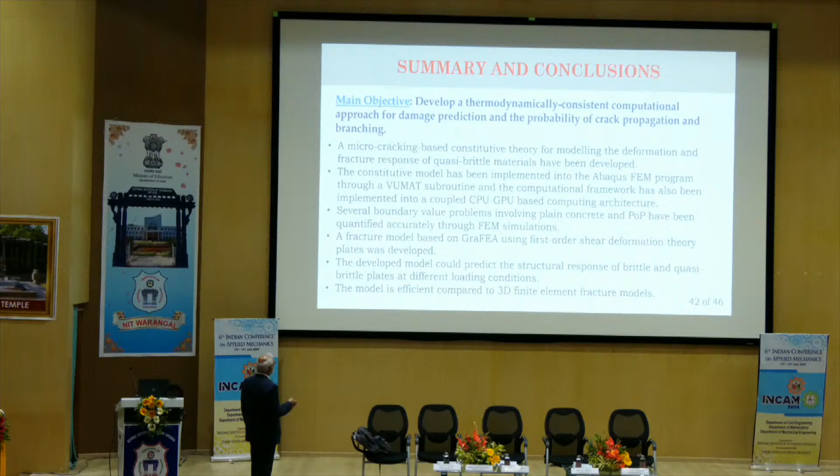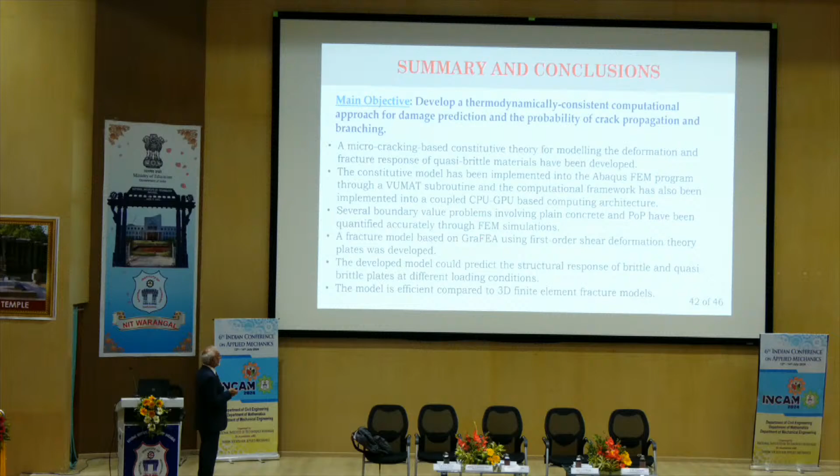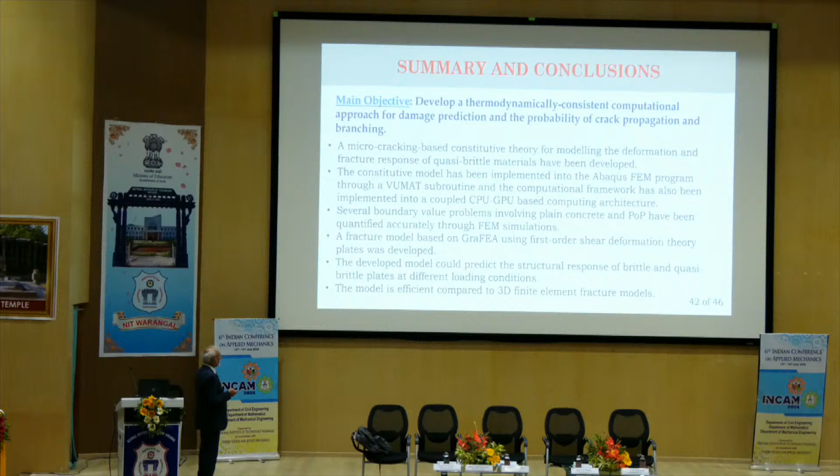We have done many examples involving plain concrete and plaster of Paris discs, and we really quantified accurately through our GraFEA finite element simulations. These developed plate-based, first order shear deformation-based GraFEA results are also very promising because we validated them against our own 3D simulations. This last slide connects back to when I started this talk.

If we cannot do it, of course we invent these tricks — that's engineering, we always make assumptions. But we should really focus effort on slowly removing those fixes and knobs by understanding and gaining insight into what is happening. Why is computation important?

Because any experiment you want to do takes time and cost, and every time you have a crank idea, what if I change this a little bit, you have to go buy another equipment, install, and test. Whereas with computation, in the middle of the night, you get an idea while thinking about something — this happens to me — you suddenly get up, go sit at the table, and try. This is the power of the computational tool.